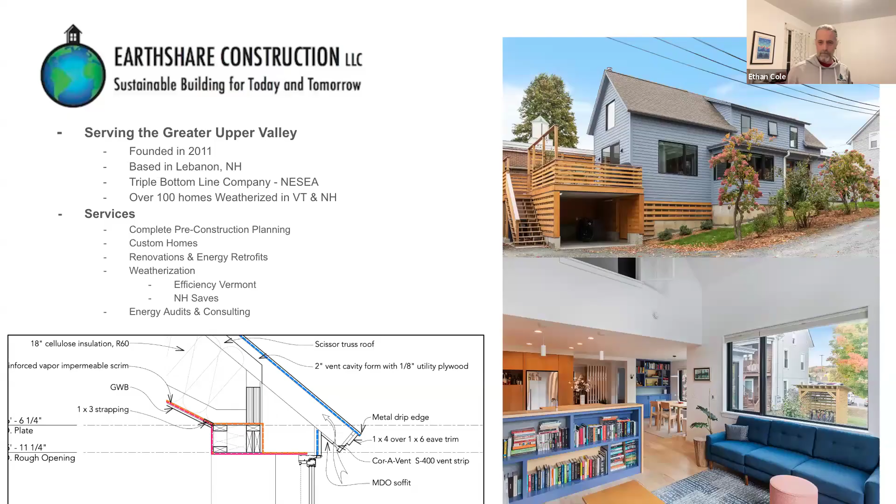All right. Sorry. It's okay. Yeah, I appreciate you plugging that info and providing that info for us, Ethan. Everybody, really appreciate you being here tonight.

My name's Ryan Hereth. Julian did a great job of giving a little bit of background about me and our company, the services that we provide primarily in New England, as well as the Mid-Atlantic, our land planning, design and pre-construction services, and construction management, as well as the actual carpentry and construction of the buildings. One of the things that sets our company apart is I think we're a service-based company who values building relationships as much as we do the buildings themselves.

And we're continually trying to improve our processes, and a lot of what I've learned in the last 10 years is working with people like Ethan, and having the opportunity to really open up the dialogue. I'm really grateful to have this opportunity, because as Joanne also mentioned, we have some great resources in the area like BS and Beer, and as much as you guys can take part in these conversations, it's really important to open things up so that we can all learn. I'm excited. I'm sure there's things that I'll be learning tonight with some feedback and some questions from you all as well.

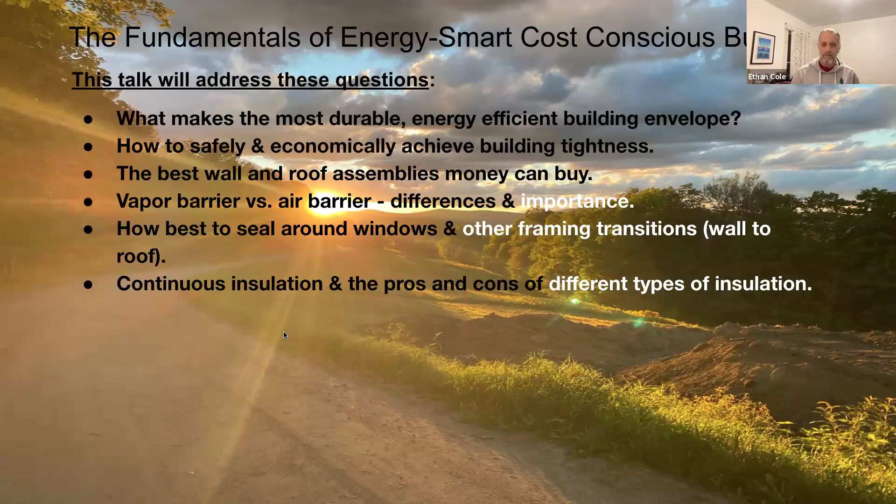Some of these topics we're going to go into more deeply than others, and we'll be leaving time for questions at the end. And as you can guess, the answers aren't always as simple as we'd like, but these are starting points.

The fundamentals of energy smart building, we got a little animation here. Let's define a little bit about what energy smart means. For starters, it refers to a building that uses less energy. One way we can refer to it is as operational energy, the energy that's used for heating and cooling of the building, lights and outlets, which is sometimes referred to as energy use intensity or EUI. And also durability. An energy smart building is one that's going to be durable. It's going to last a long time with minimal ongoing maintenance.

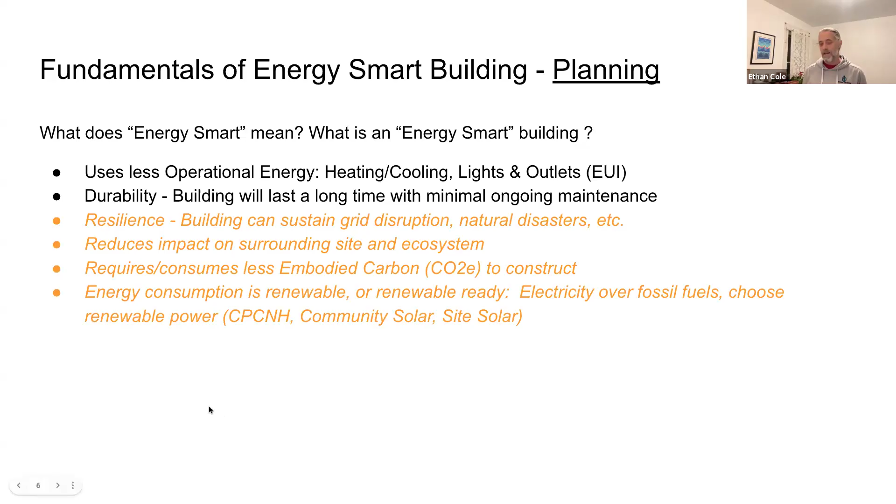Some of the other topics that are relevant to energy smart that we're not going to spend as much time on are resilience, a building that can sustain a grid disruption or natural disasters without being lost, reduces impact on the surrounding site and the ecosystem, consumes less embodied carbon to construct. We'll touch upon that, but there's been some exciting advancements in recent years allowing builders to understand the embodied carbon emissions of building materials. Energy consumption, when it's renewable for a building, can have substantial impacts.

And so choosing electricity over fossil fuels, choosing renewable power options, whether it's site solar, community solar, or the recently formed Community Power Coalition of New Hampshire. And also thinking about transportation energy and what's going to be required to get to and from the building.

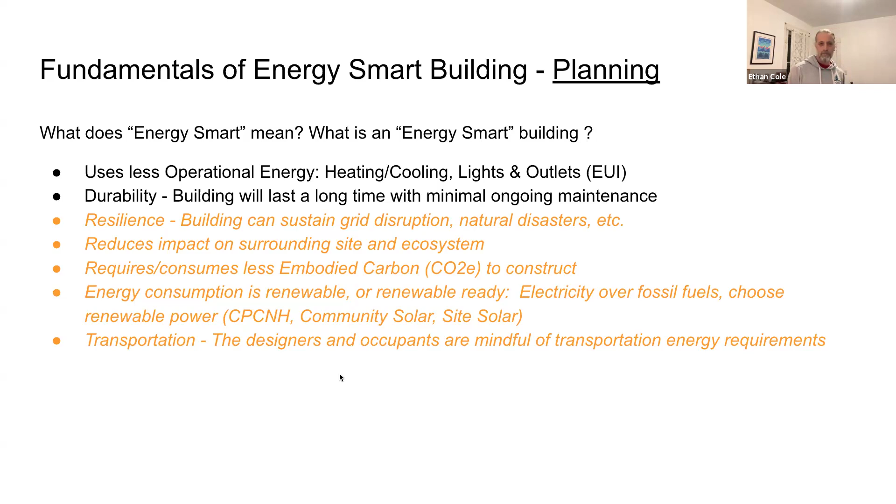So construction methods and techniques, our relationship to buildings, access to grid-tied power and energy has evolved dramatically in the past few hundred years. In the 19th century, we were building drafty structures with regionally accessible natural materials and inefficiently heating the buildings with fossil fuels. Designs often incorporated centralized fireplaces to heat the core of the home, or in some cases, fireplaces dedicated for each

of the rooms independently. In the 20th century, we started implementing man-made materials into our buildings, improved our insulation, in some cases, introduced mass production of materials with promise of greater energy efficiency, material durability, and longevity. We also gained broader access to grid-tied power.

In the past 30 to 40 years, we've come to learn that our buildings are complex systems that we need to look at as a holistic design. The industry is entering into a new phase of understanding about energy efficient design, material selection that enhances performance, durability, and environmental stewardship.

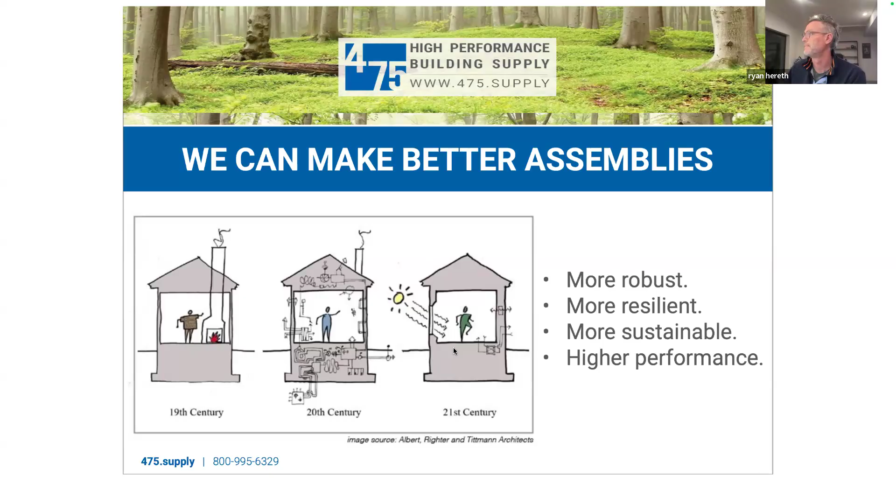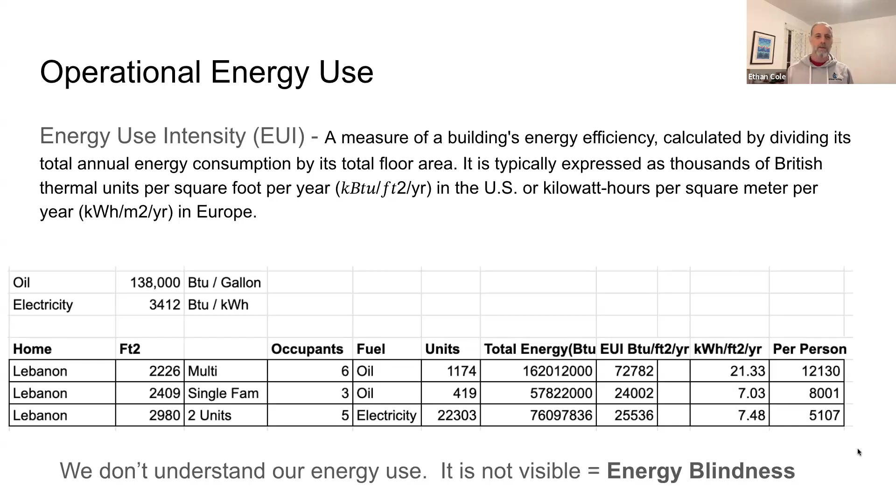Then we just show a conversion into kilowatt hours per foot per year, and then for the thought exercise, how many BTUs per foot per year are being used per person. So this concept of not really knowing how much energy we're using, whether it's for transportation or our house and all the other things we use and consume, is something called energy blindness. Thank you. I think that's enough on this slide.

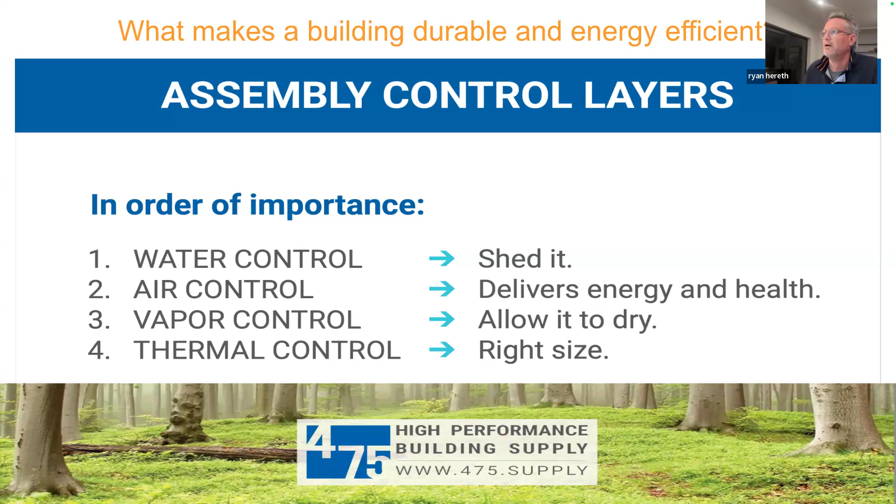Yeah. So EUI is one metric for how we measure the performance or energy use of a building. In understanding and properly constructing our building envelope assemblies, the control layers within those assemblies are the methods for how we achieve energy efficiency and durability. The fundamentals of energy smart design or building design.

So some of the characteristics and principles here that we'd like to cover with you are specifically the geometry of a building. So the more simple the geometry of the building, the less energy it's going to require. And conversely, the more complex the geometry, the greater cost to build and operate as well. The smaller buildings tend to use less energy. Specifically, multifamily buildings use less energy per capita, per unit, per person, per building.

Similarly, site design and building orientation are also key factors. Fenestrations, windows, and doors have a big impact on building performance due to their relative reduced thermal efficiency compared to walls and roof assemblies surrounding them.

Building envelope. We want to talk about our building assemblies, the walls, roofs, and foundations, and specifically making sure that we have an envelope that's airtight and durable. We'll touch on some of the operational energy use, the heating and cooling energy use intensity that Ethan was just talking about, the EUI, the mechanical systems within the building, appliances, ventilation, both for the equipment in the building as well as occupants. Lighting and plug loads are also factors that we're probably not going to be able to get into today, except for maybe in the chat afterwards.

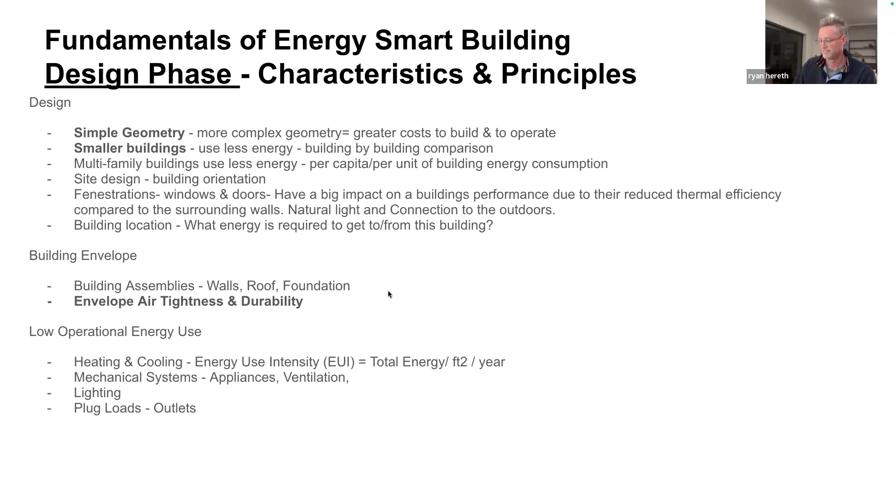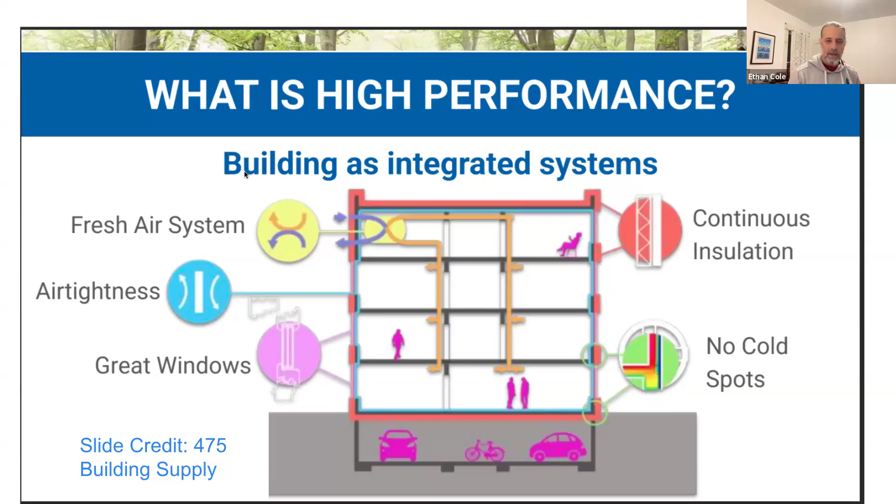So this is just a nice graphic from 475 that shows the components of a high performance building. We need to pay careful attention to continuous insulation at the entire perimeter of the envelope, especially including cold spots. There's always going to be some vulnerable spots in an assembly at transitions and other such locations. You want to have great windows. If you're going to have a great envelope, you want to have great windows to go along with it. When you're going to make a building tight, you need to bring in mechanical ventilation, and air tightness is the primary driver of energy efficiency.

So Joanna posed the question about how to safely and economically achieve building tightness. And I think this comes from a couple of places. One place is we've all heard the notion that a building needs to breathe. And it's well known in modern construction that is not true. The occupants need to breathe, and a building needs to be able to dry out. So the notion that a building needs to breathe, and also the recognition that if you do not manage the moisture in your building adequately, you can have trouble.

So in order to safely achieve building airtightness, you need to make sure your assembly is vapor permeable, that it can dry out if it gets wet. You also need mechanical ventilation. The occupants need fresh air. And if there is a combustion appliance of any kind, make sure it has clear, closed combustion air and exhaust paths. We advocate for no fossil fuels, but if you're going to have fossil fuels, or wood stoves are okay, they just need closed combustion, dedicated combustion air, and a flue. Ryan, you want to talk about economics a little bit?

Yeah, we need to make sure the air barrier is clearly identified and detailed during the design phase. It's critical for coordination with our crews on site, as well as ensuring that we have continuous air barrier on both sides of our assembly, which we'll get into later. We're constantly designing the process and sequence of that building with that air barrier in mind as well. And we'll get to that later as well.

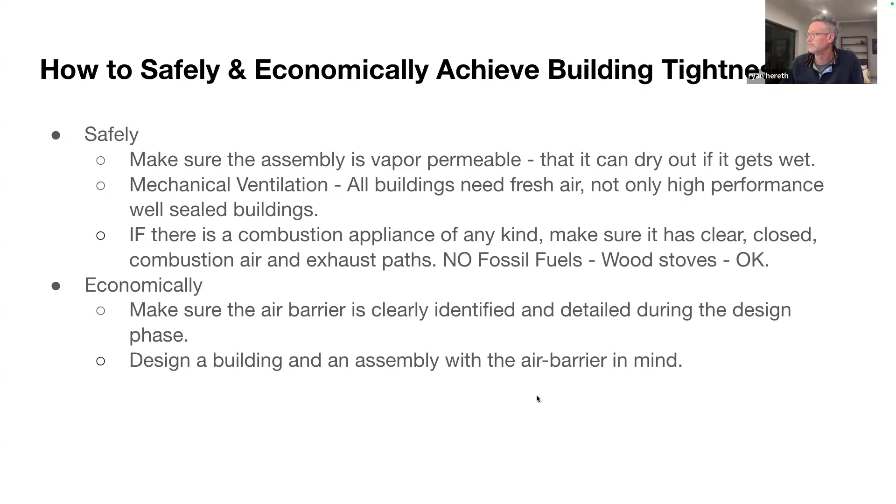So this one now, slide that shows a ventilation system. Yeah, just emphasizing the importance of ventilation. And I'm sure Joanna will probably have whole talks on ventilation in the coming months. Yeah.

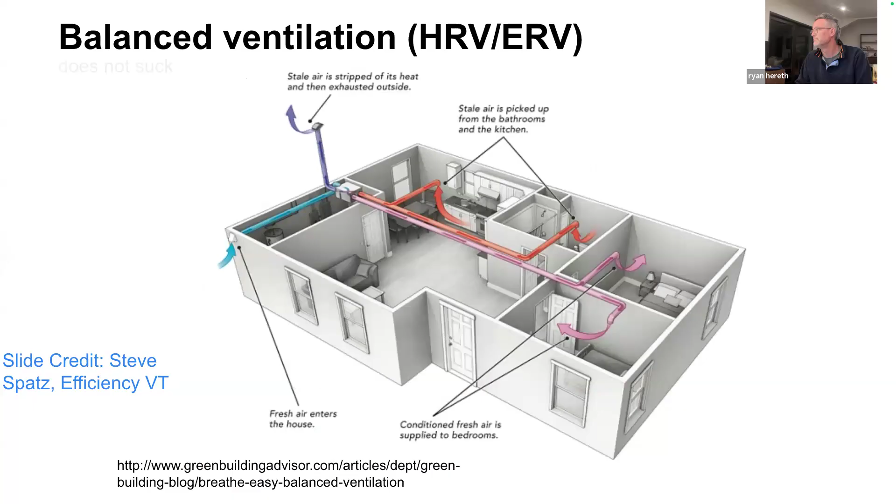Generally, just want to talk a little bit about insulation types. We're not going to spend a whole lot of time on this today, but the widely used ones in the industry are fiberglass, foam plastics like polyiso, EPS, extruded polystyrene, cellulose, which is a shredded paper, rock wool, mineral wool, which you may be familiar with, wood fiber insulation like from Timber HP in Maine, Gutex or Steico, which are coming from overseas, and straw panels and straw bales.

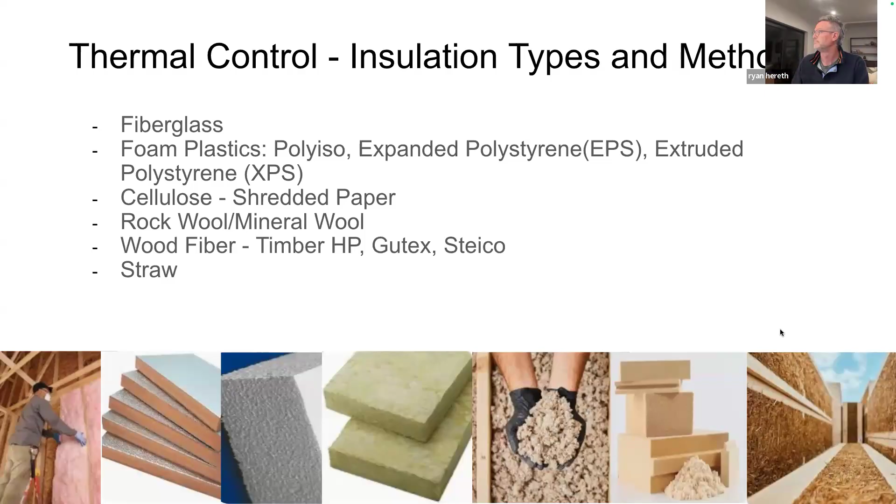So the best wall and roof assemblies money can buy. This is a question that we love to debate, but also needs to be defined. So how do you measure it? Do you measure it by thermal performance and its resistance to heat loss? Do you measure it through affordability, through the carbon emissions of the building, either during construction, during operation, or both, or the longevity or durability?

Some of the best wall and roof assemblies money can buy include, and we'll talk a little more about these, a double stud wall or otherwise thermally broken stud wall with cavity insulation only in the cavity. Or you have exterior continuous insulation where it's put on the outside of the structural building cavity.

These days, as you probably all know, there's all kinds of companies that are offering panelized walls and modular units to build your homes, and there's a lot of good products out there, and they all can achieve similar results. People often ask, what's the best way to do it? What do you think of this? What do you think of that? And there are pros and cons to each. They're not as different as you might think, and you really have to define what your goals are and what your values are in order to make those kinds of decisions.

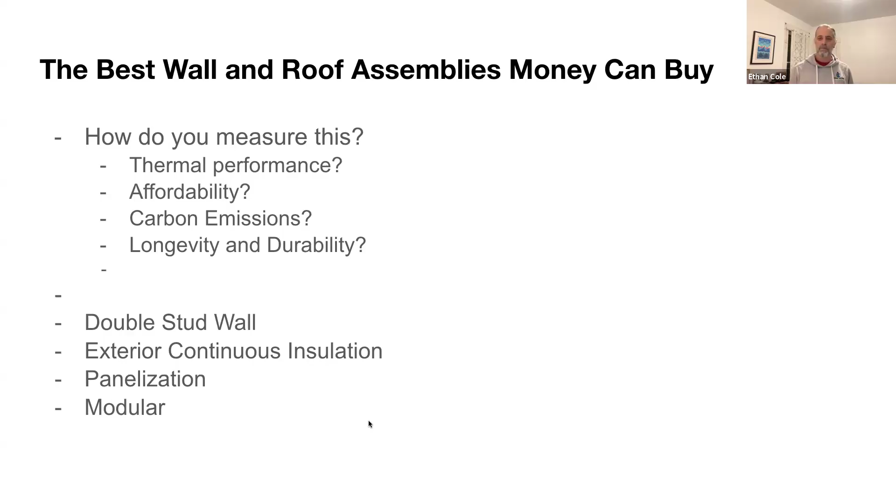So this just illustrates the double stud wall, which can be done a number of ways. But as you can see here, you have an outer structural wall generally. On the top left here, you can see it's a 2x4 structural stud wall. And on the inside, you have a 2x3 framed wall. And the entire cavity is filled with, in this case, it looks like it's probably cellulose. That's what we use. And so the space in between the stud walls is the thermal break, so that the wall is not a continuous thermal bridge.

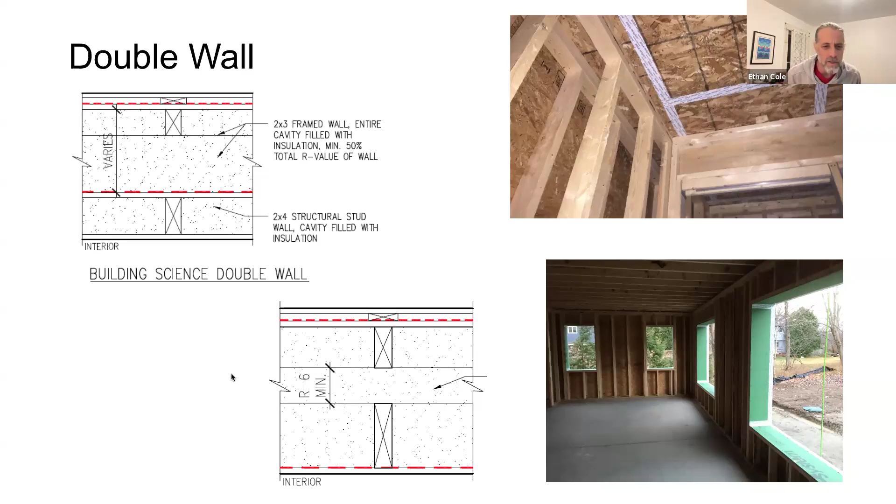You could build the entire wall out of a 2x12, a 12-inch stud, but then you'd have bridges at every framing member. And that's what this gets away from. It also uses less wood. Yeah, the bottom wall is similar. It just uses a 2x6 and a 2x4 wall for the interior, but they perform very similarly.

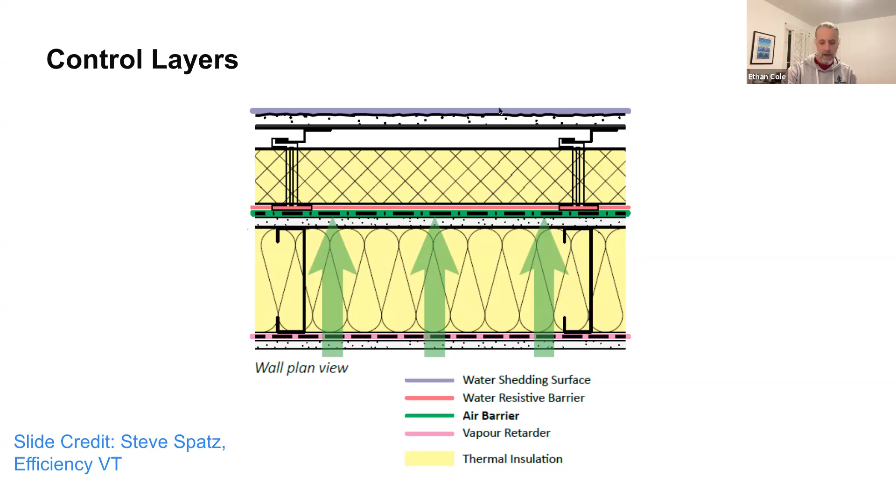Okay, so we've talked a little bit about our wall assemblies there, the envelope of the building. Now we're going to take a second to talk about thermodynamics. So conduction, convection, and radiation.

Excuse me, Ryan, I apologize. I wonder if this might be a good time, before you go into the thermodynamics, to see if anyone has questions about what you just talked about, the wall assembly and the different layers. People could put something in the chat or just unmute and speak up. There were a couple of questions in the chat, but I don't know that they apply. And just so you guys know, we will be diving deeper into the wall assemblies. Oh, you will? Okay. Yep, we'll be kind of coming back to them.

Sorry. It's okay. So thermodynamics comes into play because conduction, convection, and radiation are three primary types of heat transfer occurring in our buildings. And they're constantly interacting with our walls, roofs, and foundations, which absorb and release heat through conduction. Convective air leaks out at the building seams between the walls, roof, and foundation, and penetrations for exterior plumbing, light fixtures, etc., if not sealed well. Radiation from the sun can actually overheat our buildings if they're heavily glazed.

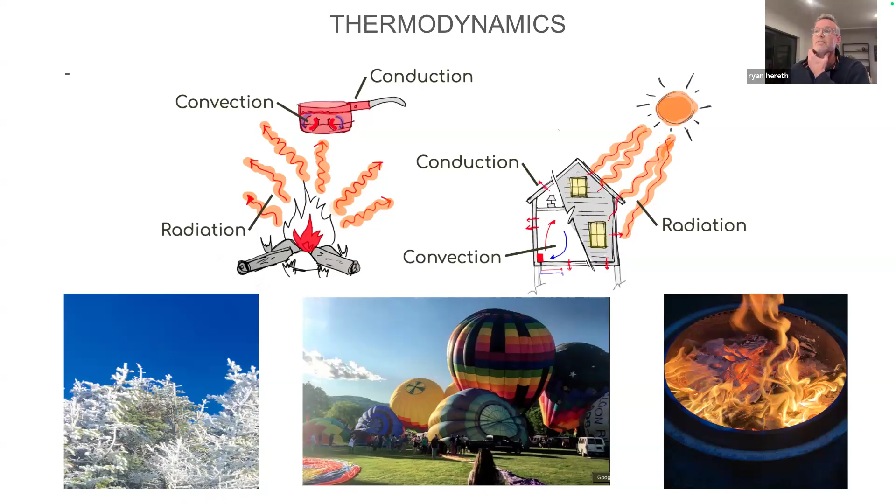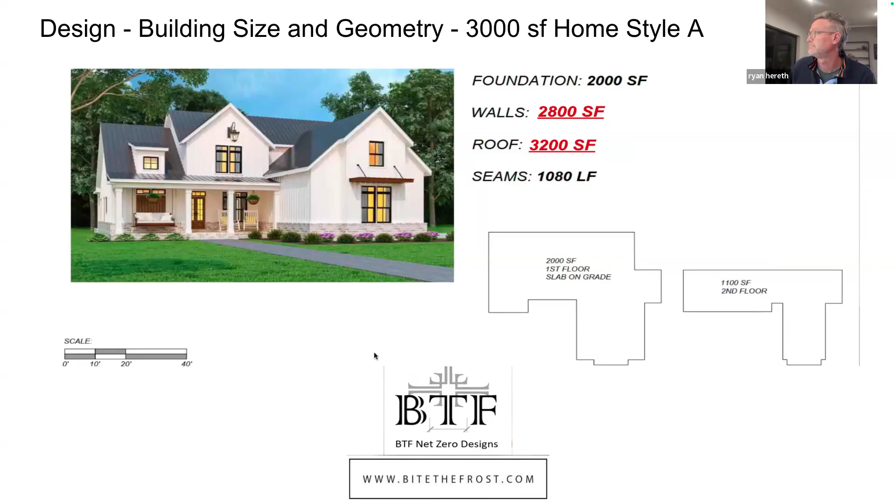In scenario A, or style A, it's a more complex geometry with multiple volumes intersecting. It's a two-story building with a 2,000 square foot footprint, 2,800 square feet of exterior wall surface, and 3,200 square feet of roof surface, a total of 1,080 linear feet of seams. This is just a visual of what those wall surfaces, roof surfaces, and foundation surfaces look like for style A.

Style B is a more simple two-story cape home with a 1,750 square foot footprint and a 1,600 square foot wall surface. It has 2,500 square feet of roof surface. Relative to style A, this is a very efficient use of floor space with a considerable reduction in surface area and seams. Again, a visual of style B's surface areas.

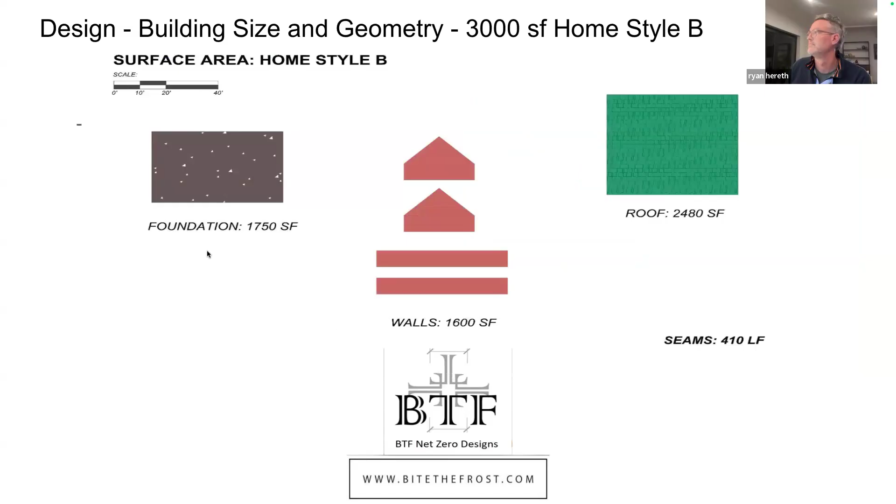Style C is very simple geometry, similar to style B, yet with an even smaller footprint of 1,150 square feet and a taller eave wall. So less square foot per floor, but there's 3 floors inside, which, again, add up to that 3,000 square feet. The key difference between C and B here is that the square foot of the walls has increased from style B, but the surface area of the footprint and the roof have also both significantly decreased.

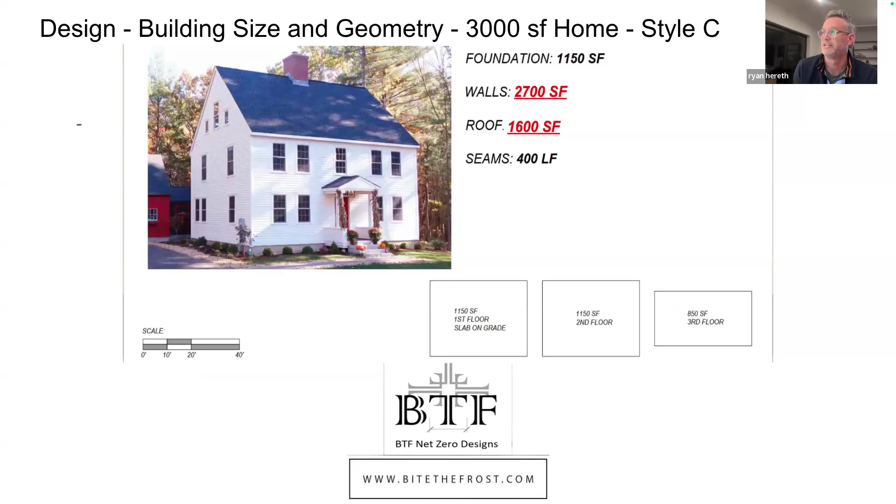If we look at the total square footage of exposed surface area to the exterior envelope, we can see how the geometry of the building plays a big factor in how there's opportunity for heat transfer, heat loss, and gain in our buildings, with buildings that all have the same square footage. So when we're designing buildings for energy efficiency, we need to be thinking about simple geometry.

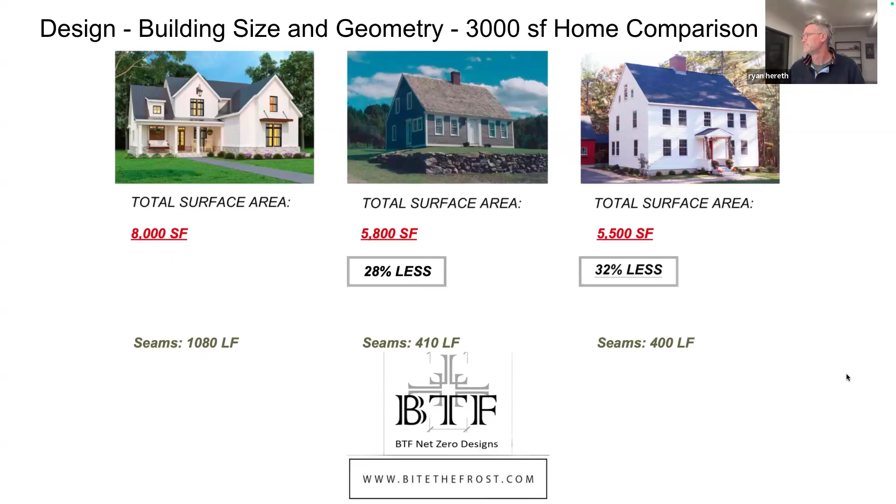So this next slide is really to depict another example of this. We have two buildings that are about the same square footage, just right around 1,450 square feet. The only differences between these two buildings, beyond that very slight square footage difference, are the exterior wall surface area, the window and door locations, and the quantity of those windows and doors. The impact between these buildings because of that building geometry and surface area is a 60% increase in the heating

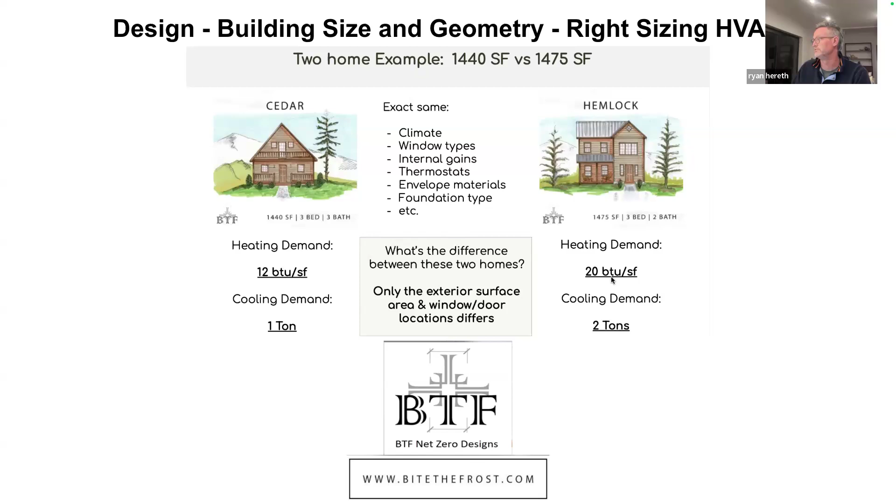and cooling demand. You can see the building on the left here has a 12 BTU per square foot heating load, and the building on the right has a 20 BTU per square foot heating load. That's the energy use intensity number I referred to earlier. And when building new and designing for high performance, you can get that number nice and low.

Yep. So the big takeaway here, folks, is that the two biggest levers we have to pull on to be able to create energy efficiency in our buildings are simple geometry and getting our buildings airtight.

I just want to speak to, so someone in the chat is asking a question about ventilation. They're having a house built, and we can talk more about that ventilation later. I think we'll have time for that, because that's critical. But I would say if you're building a house, you want to know what your air tightness target is, what your builder is aiming for, and how that's going to impact the performance of the building.

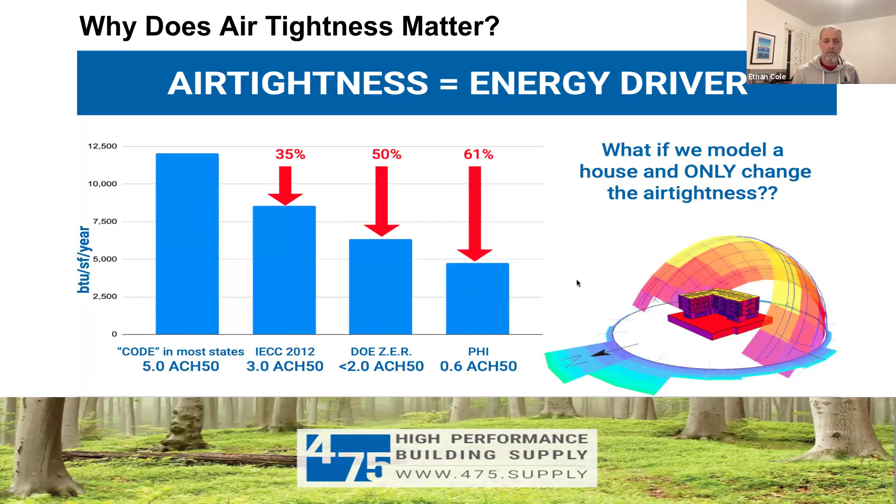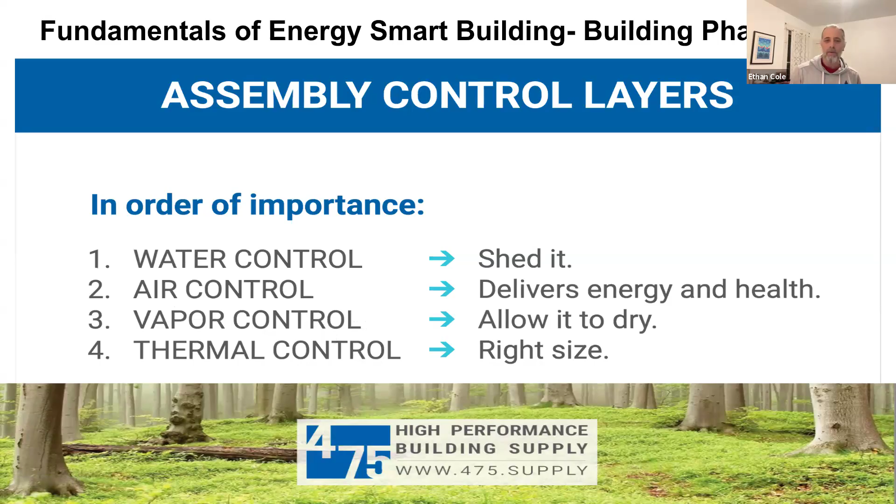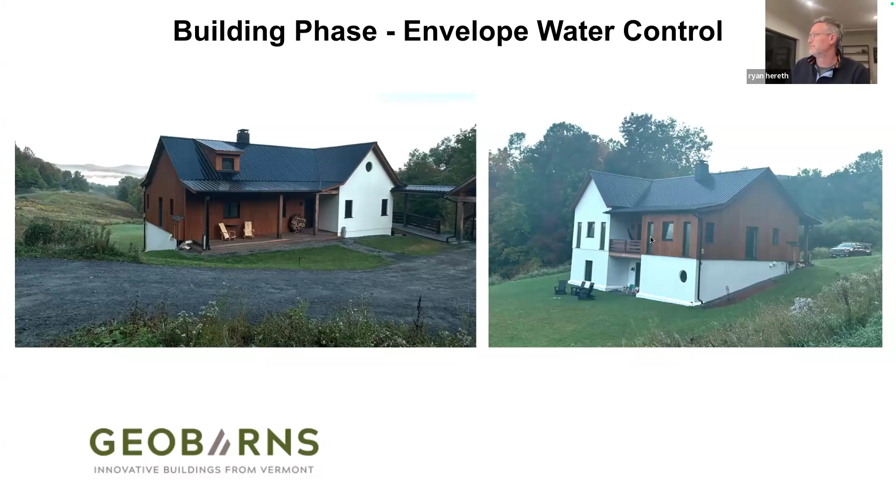Wind-driven rain hits wood siding, which is strapped out on a rain screen, or a lime plaster, as you can see on the white surfaces here, which provides protection to the surfaces within that wall assembly below.

So when the sun hits that siding, with that air gap behind it, the siding will heat up the air behind it through conduction, and then create a natural vapor drive to pull any moisture that's in that assembly, or has found its way behind the siding or roofing, out of that assembly.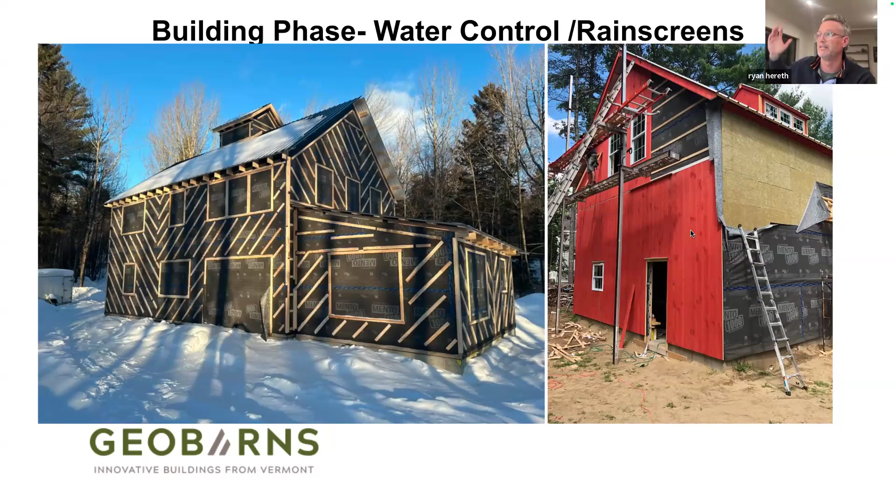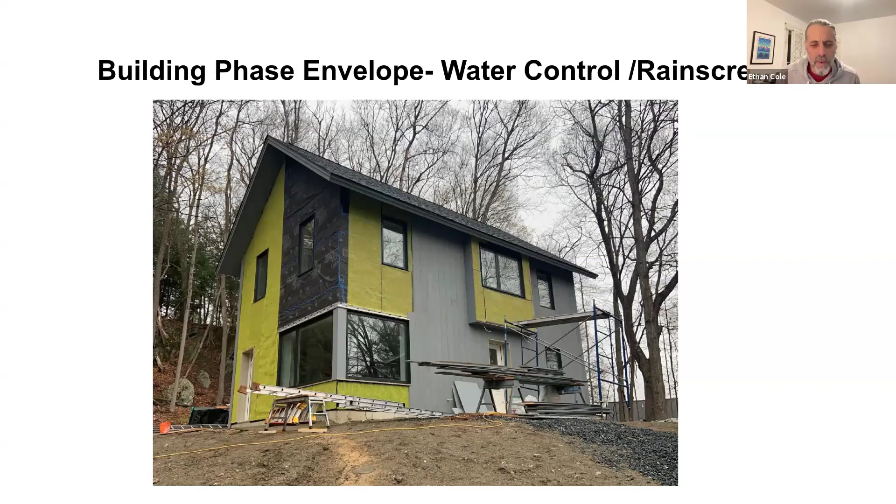This is just another type of rain screen. Instead of wood strapping here, we're using a mesh product that's sometimes called Cedar Breather or Home Slicker that's behind the vertical pine siding. The black membrane you can see there is the air barrier on this house.

So here on the left is a detail of one of our vented roof assemblies in process. We have some transition taping here that's happening between our water-resistive air barrier coming down the roof and transitioning to shed water down the wood fiber insulation on the walls of our buildings. We have strapping, rafter furring strips that follow the rafters up the top of the building, and then purlins that we're mounting our roofing to.

The center photo here depicts the taping and air sealing around our windows, and proper detailing and flashing of our sills to shed water as they hit the window and run down the face of the building, so it sheds water over where the cladding will eventually be.

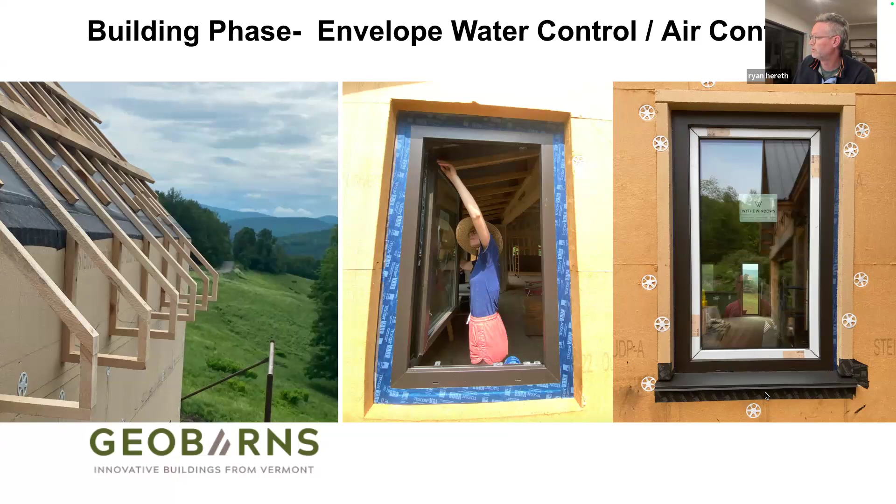There's a similar set of photos in that same sequence. You can see how the horizontal strapping here on the left is how we're mounting our extension jambs and siding. Similar with the plaster detailing around, connecting to the window and shedding down onto our metal sills.

The photo on the right is just a depiction of how natural lime plaster can act as a water barrier, air barrier, and a vapor open, vapor variable vapor retarder. We'll get into that in a little bit.

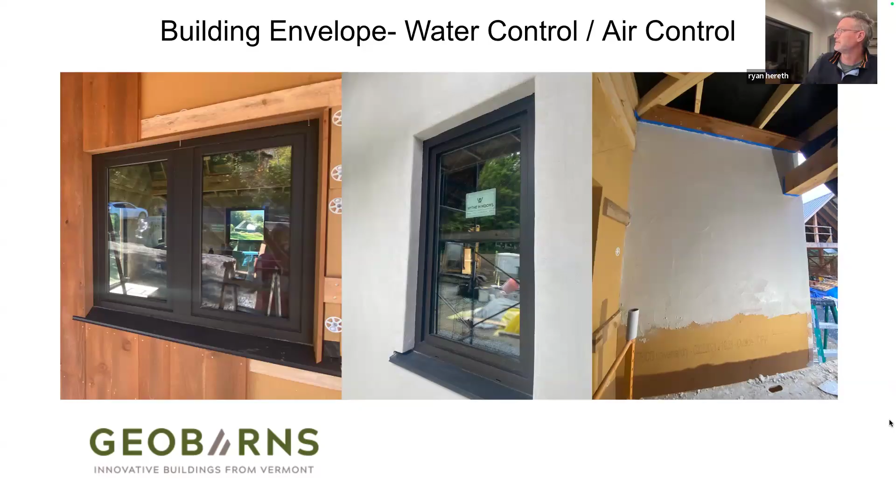When designing a house, you want to be able to draw a continuous line using a pen that indicates the control layers, unbroken control layers. And in this case, this is showing an air barrier that's at the interior of the finished surfaces.

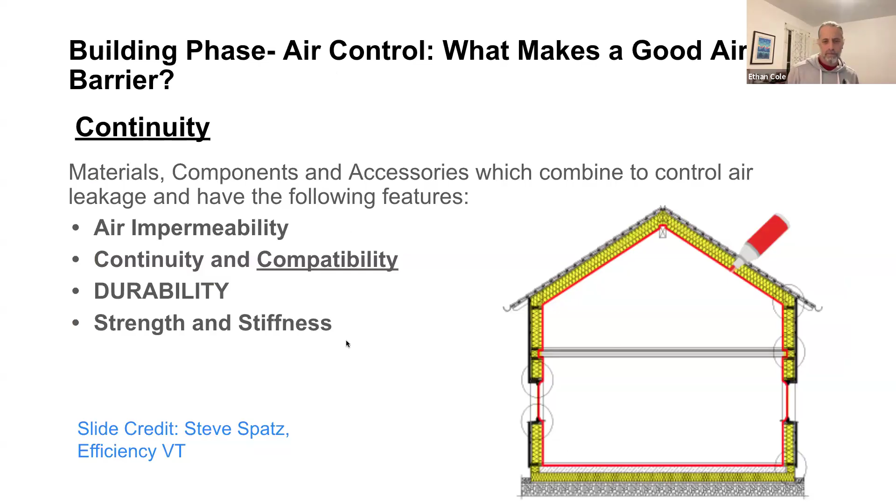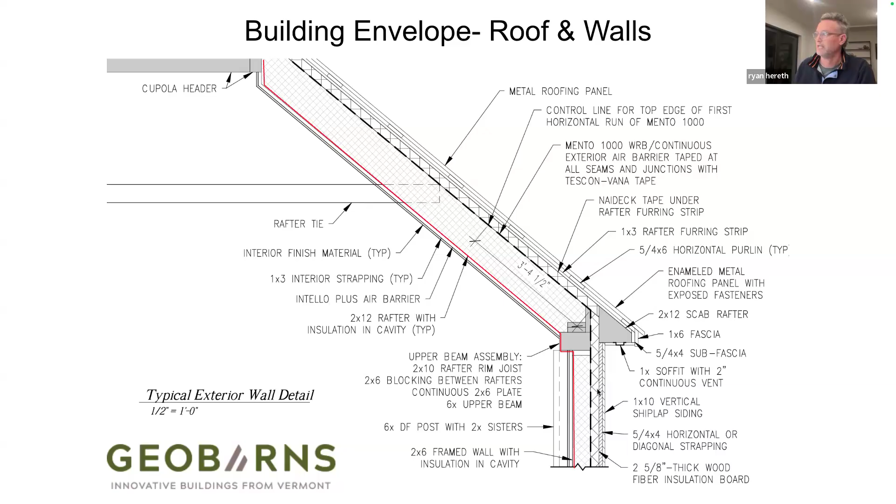So similarly with the interior of the building, we want to be able to create a line, shown in red here, that goes all the way around the inside of our conditioned envelope. We also want to have that air barrier running, depicted with the dotted line here, around the exterior side of our envelope. So we're encapsulating our walls, roofs, and foundations on all six sides of the building.

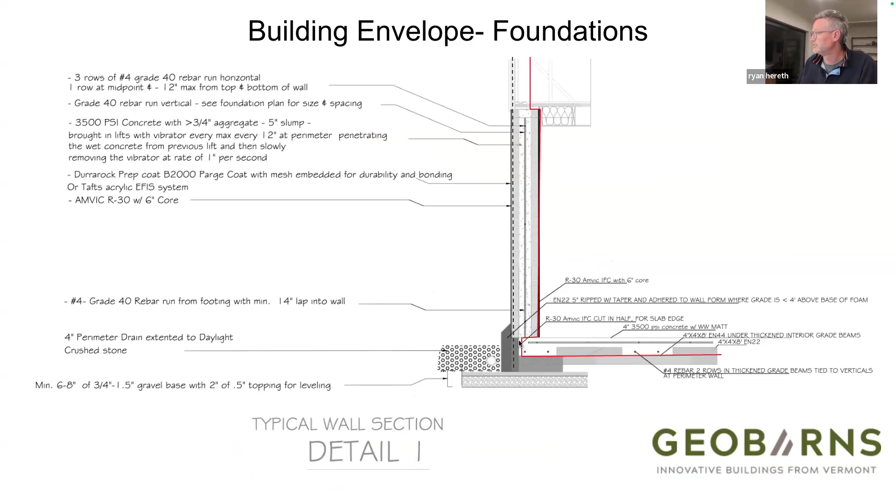We can see those transitions at those junctions where our foundation meets the walls. We want to be able to tape those seams and air seal them. Similarly, where we have vapor barriers underneath our foundation slabs, we want to make sure we're getting good connections at those transitions.

So just a little introduction to the difference between air barriers and vapor barriers. Air barriers control energy loss, and they need to be as close to 100% continuous as possible. An air barrier that's only 98% effective is not going to do a very good job and give you great results. You need it to be 100% implemented. By contrast, a vapor barrier that is 90 to 95% effective will stop the majority of the vapor.

So important distinction there. But the air barrier and air-driven moisture is one of the number one concerns. So you need to have a good air barrier. A vapor barrier alone is not going to accomplish the goals of protecting the building envelope. Air barrier will stop moisture transport through air movement.

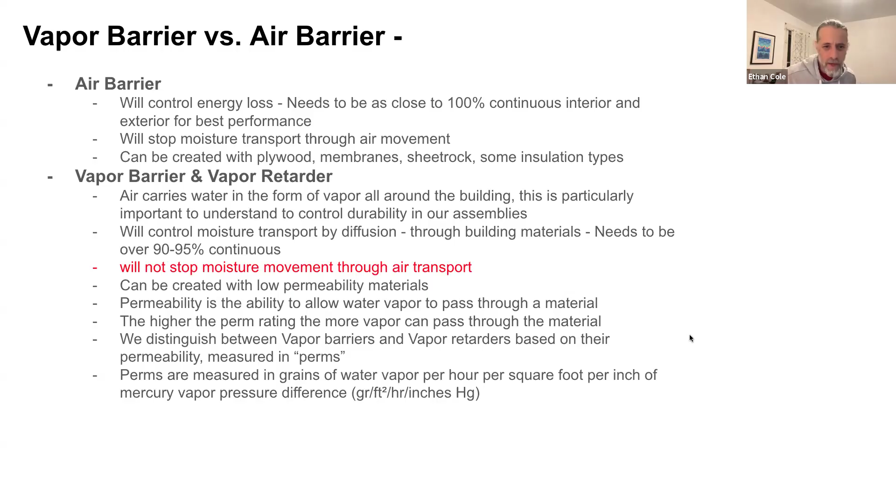Heat and moisture wants to move from where there are higher concentrations to where there are lower concentrations. So from where it is warmer to where it is cooler. So generally, our heating season is when we're concerned about this stuff. And so we will talk about the permeability of different materials and how they stop the movement of water, or conversely allow a certain amount of moisture to travel through them. The higher the perm rating, the more vapor can pass through the material.

Here we see the perms of various building materials. The blue, the Stego-Crawl, is a plastic 15 mil vapor barrier intended to not allow moisture transport. So you can see that it falls into the vapor barrier class 1. Then between 0.01 and 0.1 is a vapor retarder class 1. And the next level up is vapor retarder class 2.

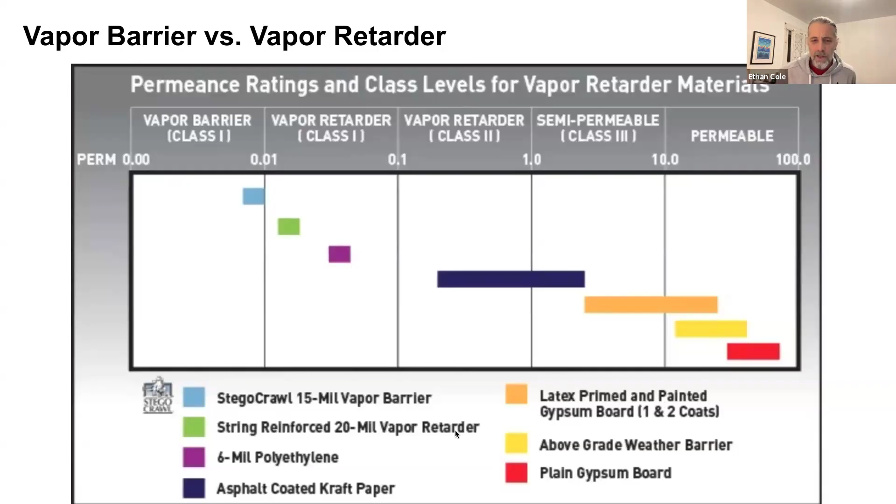Let's see, in the vapor retarder class 1, you've got your plastics that are thinner. So even those plastics do allow some moisture transport. Then you've got your asphalt coated kraft paper, felt paper that you'll see on some older houses. And then as you move up into semi-permeable class 3, you've got latex primed and painted sheetrock. And then your yellow is some sort of weather barrier. And then plain sheetrock that's not painted has a higher permeability rating.

So one of the things we need to be mindful of is that when we combine our air barriers and vapor barriers and these materials within our assemblies, we need to be careful about creating what they call a vapor sandwich. So we want to make sure that ideally we're using air barriers that are vapor open, that are in that vapor retarder category and have a high permeability, or that are vapor variable, sometimes referred to as smart vapor retarders. And what that does is it stops air from getting into that assembly, but it allows vapor to diffuse through that cavity.

Which also means that seasonally, if we have that rain screen strapping on the outside of the building, or we're cooling our building on the inside, that moisture, the humidity, the vapor that gets into that cavity has the ability to dry to the outside of the assembly.

Ryan, I think we got to pick up the pace a little bit. We're about 34 minutes in, or 35 minutes in, I think. Okay, it looks like we got like 17 or 20 minutes before we should start taking questions.

Okay, sure. Another area that is critical is if we have flat roofs or a vapor closed roof membrane, we just need to be mindful about using spray foams in those areas, because they can cause that vapor trap that we were referring to.

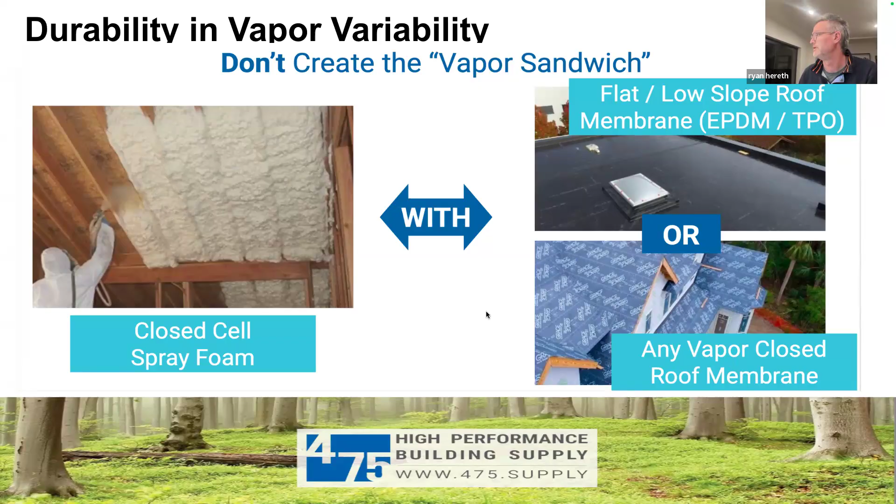If you have moisture moving through a wall, you'll see it gets to a point where it hits the dew point and where it condenses and freezes. And in this photo, the moisture has gotten through the fiberglass, frozen, and created a layer of frost. And this is a condition that happens out there all too often.

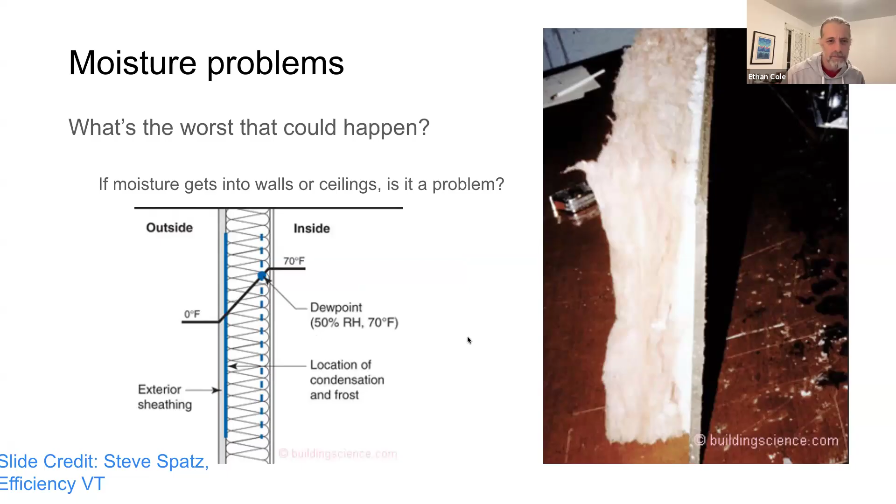One way to help keep that from happening is by using these intelligent membranes, or variable vapor retarders, on the inside and outside of our buildings. Some of the ones that Ethan and I like to use are distributed by 475. They're from a company called Proclima. And this is the Mento 1000 on the exterior. They also have an Intello membrane on the interior.

These materials, somewhat miraculously, have a low permeability rating when the relative humidity is lower. But when moisture does get into the assembly, the permeability rating changes. And so, yeah, pretty fascinating. I don't really know the physics of it. Haven't heard anybody really explain it comprehensively. But that's what these materials do and claim to do. Yep. There are some great videos on the 475 building website that delve into those physics a little bit deeper. I don't think Ethan and I are qualified to do that here tonight.

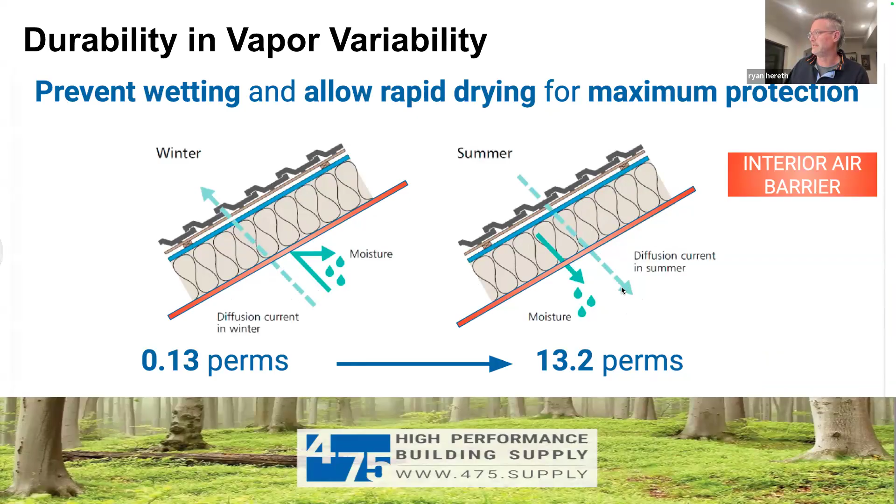This is another pictorial illustrating that diffusion happening in the wintertime. Vapor can diffuse through the cavity, but moisture is held out. And in the summertime, any moisture that finds its way into the cavity can dry to the colder, drier indoor conditioned environment. Yeah, going from 0.13 perms to 13 perms. Yeah, pretty impressive. Yep.

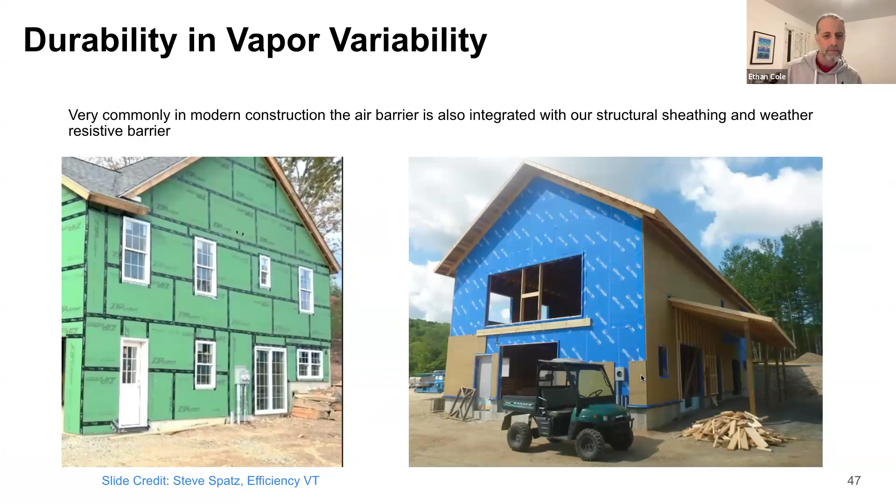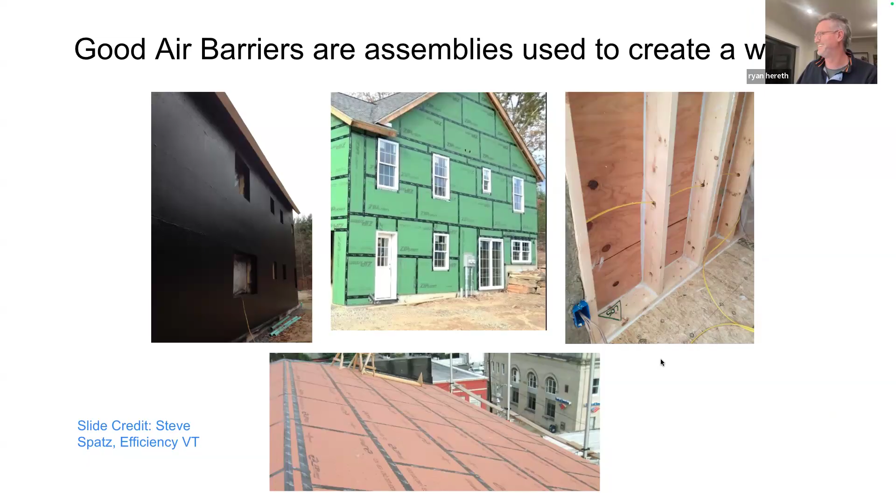So yeah, just some different ways to accomplish an air barrier. You got the Zip System on the left. You've got the Henry Blueskin on the right, and in that project, it looks like they're installing rigid mineral wool boards over the top of the Henry Blueskin. On the left there, you've got a spray applied membrane. Tremco is one of the companies that does those kinds of applications. And then on the right there, you see some studs that have had a whole lot of caulk applied to them. I've had New Hampshire building inspectors make us do this. No kidding. Yep.

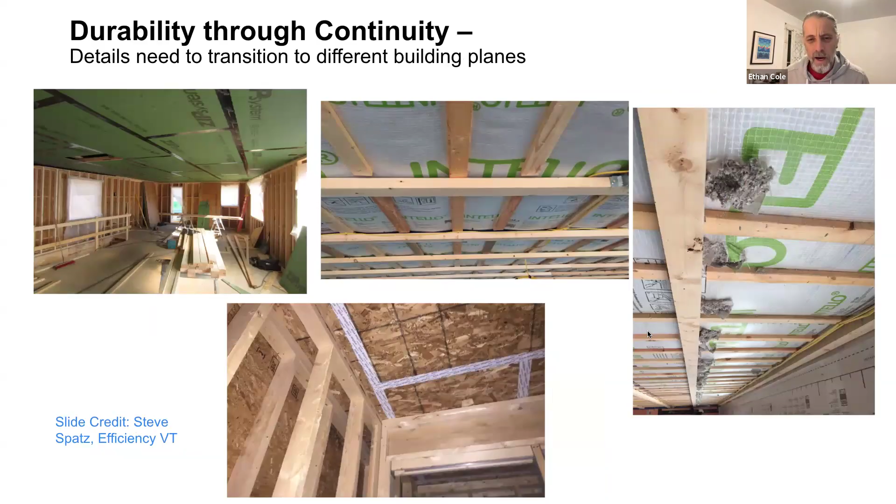Some Intello, it looks like, utilized at the ceiling. When you're using that for an air barrier at the ceiling, you can install some strapping so your wiring can stay to the inside of that air barrier. And then you'll sometimes drill some holes in it, cut some holes in it, blow the cellulose in there that you can see poking out, and then most of the time, you'll tape up those holes. Yep.

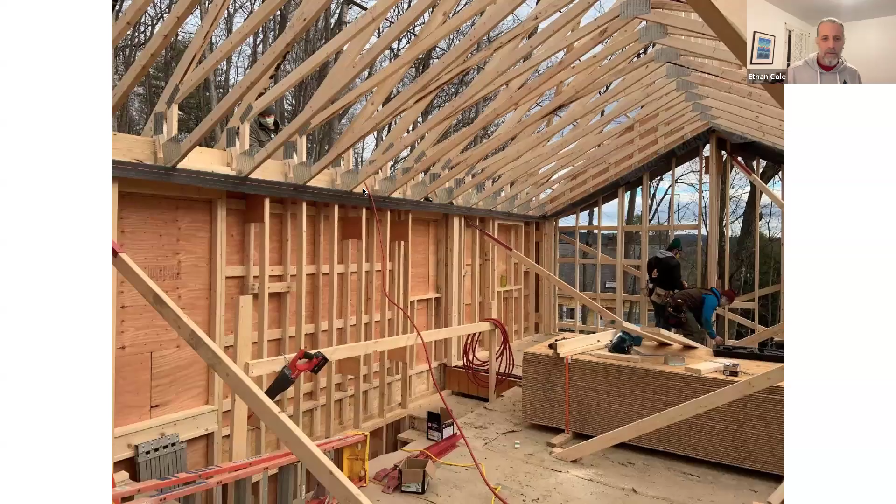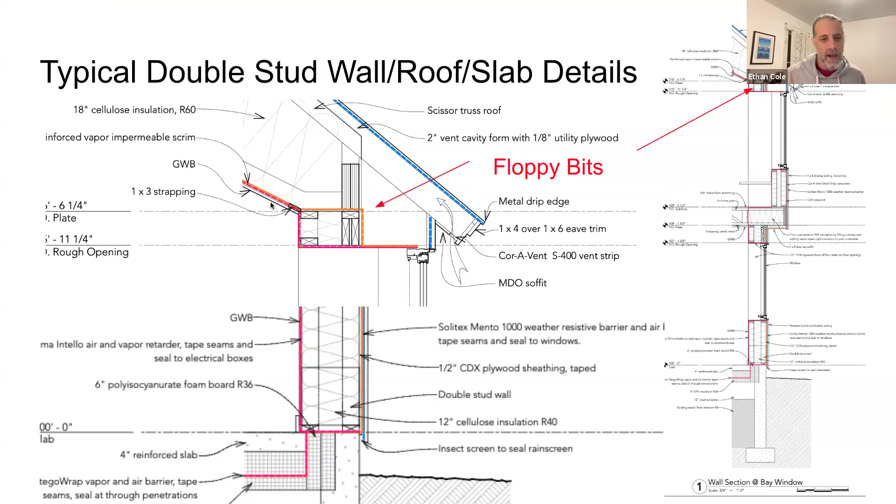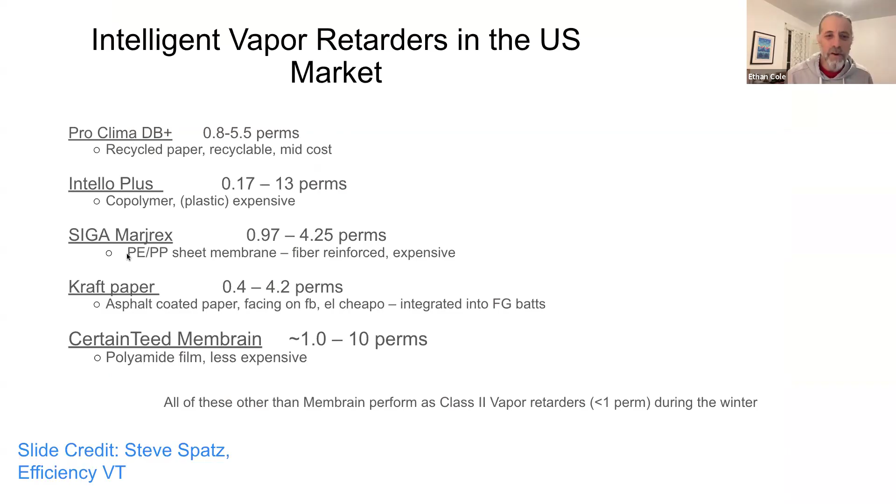So this shows a typical double stud wall and some roof and slab details. And the thing I want to point to here is the idea of the floppy bit, which is a really effective strategy for transitioning the air barrier from the exterior plywood in this case, and that's what Ryan's pointing to here, is this black membrane which comes over the top plate, and then the roof trusses are set atop that, and then the air barrier, once it gets to the inside, runs along the bottom of those trusses. So floppy bit is actually a technical term to refer to the materials used at these transitions. This is just a few different intelligent vapor retarders that are available in the US market.

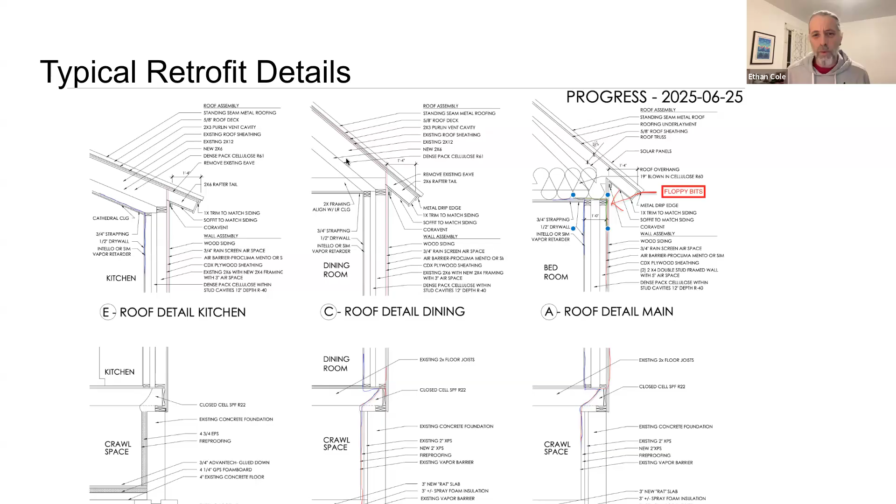Here we're showing that when you're doing an energy retrofit, there can quite often be a number of conditions and a number of different details in the assembly. And so in this case, the air barrier exists to the outside of the framing in some cases. There's vent cavities on top of the sheathing in the detail on the left, and over on the right, it uses the same floppy bit transition that I was describing in the previous slide. Another example of the floppy bits in play here.

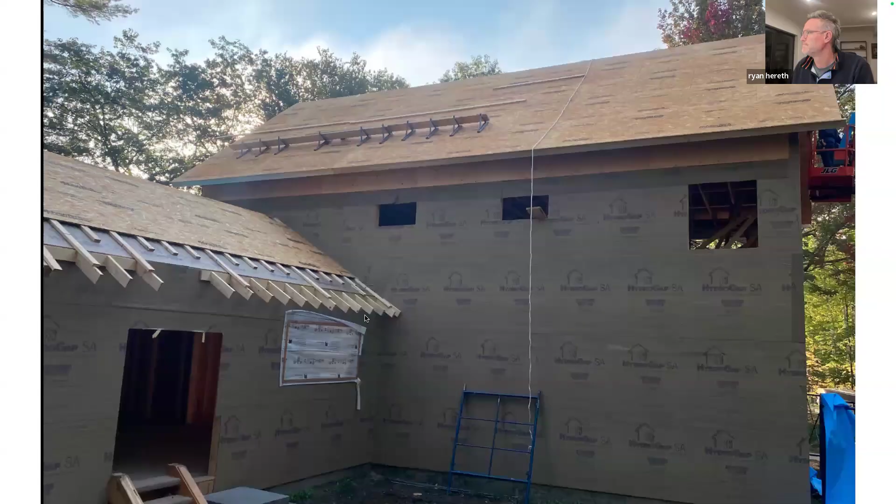In this slide, you can see that in the main volume, the larger volume, the air barrier is that HydroGap material there that then transitions above those windows to the bottom of the roof trusses. Whereas on the left, because it was an existing volume, the air barrier travels up over the top of that sheathing, and then you have an air space vent cavity above that sheathing, and then a second layer of plywood.

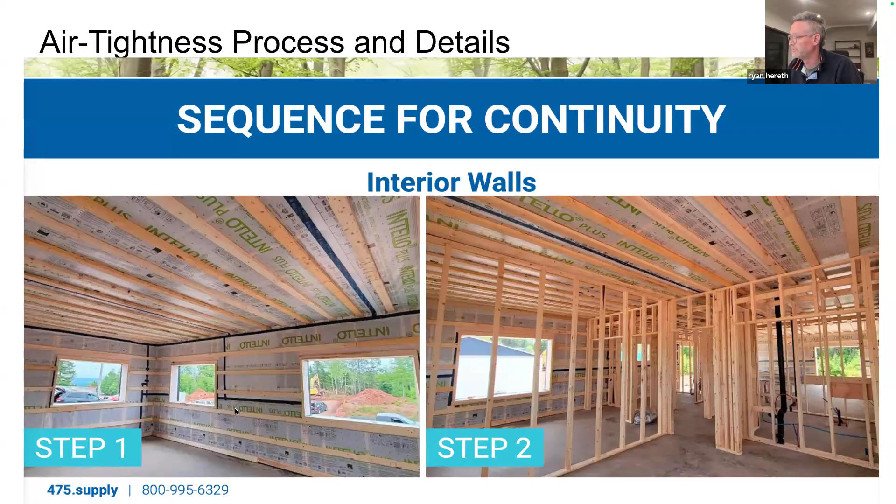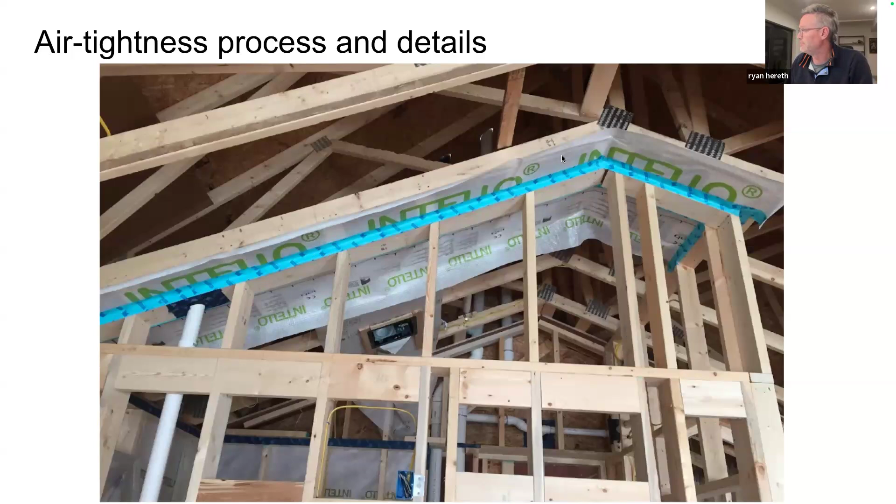One of the things that's important to do is also think about the sequencing. That's what the floppy bits are doing, allowing us to install that air barrier that we can then tie into the assembly as we're putting it together. So similarly, we can see that on the second floor with the flat ceiling, we've installed the vapor barrier, strapped out the walls, and then we frame our interior walls. For cathedral ceilings, oftentimes what we'll do is set blocking between our rafters, then install strips of the interior air barrier and vapor control layer, and then frame up our walls underneath that.

And we convert the reading of cubic feet per minute into air changes per hour, ACH 50. Air changes per hour at 50 pascals. And CFM stands for cubic feet per minute. So for an example house, say it's a 2,000 square foot house with 8-foot ceilings, 2,000 square feet times 8-foot ceilings gives you a volume of 16,000 cubic feet.

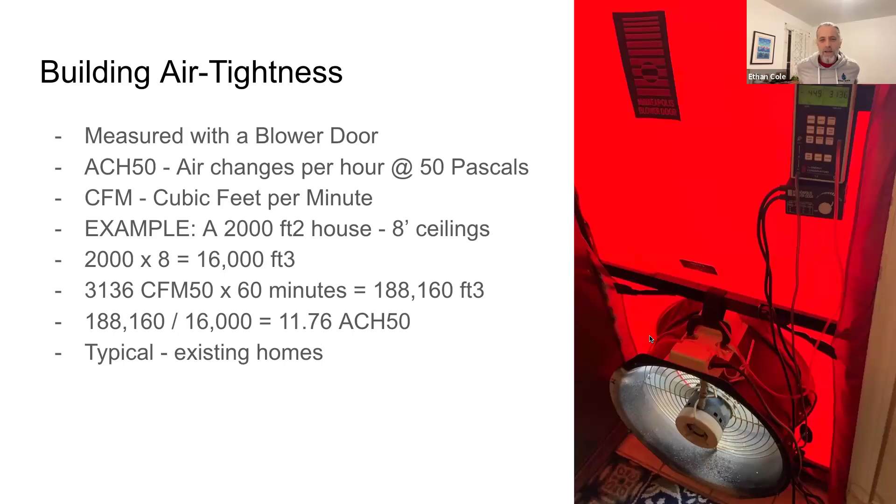So if the fan in this picture is measuring 3,136 cubic feet per minute at 50 pascals times 60 minutes, it means there's 188,160 cubic feet moving through that fan each hour. So divide that total volume of air by the volume of the house, and you'll see that this house has 11.76 air changes per hour at 50 pascals, which is in the range of typical for many existing homes. It's a little high, but it's typical.

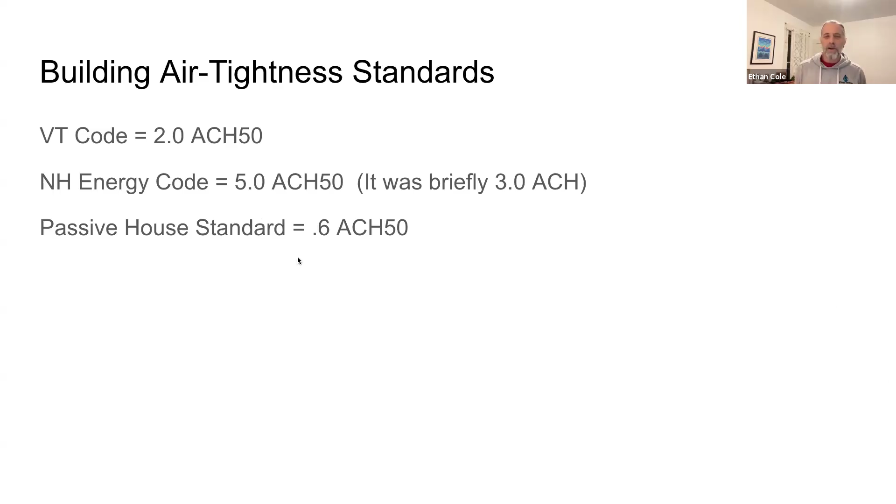For reference, some standards that exist in Vermont, the Energy Code now requires less than 2 air changes per hour for any new built homes. New Hampshire, by contrast, has a standard of 5 air changes per hour at 50, which is not very good and not hard to achieve. It was briefly at 3 air changes per hour before it was rolled back. The passive house standard is 0.6 air changes per hour at 50, which takes some effort and planning to achieve, but is quite attainable.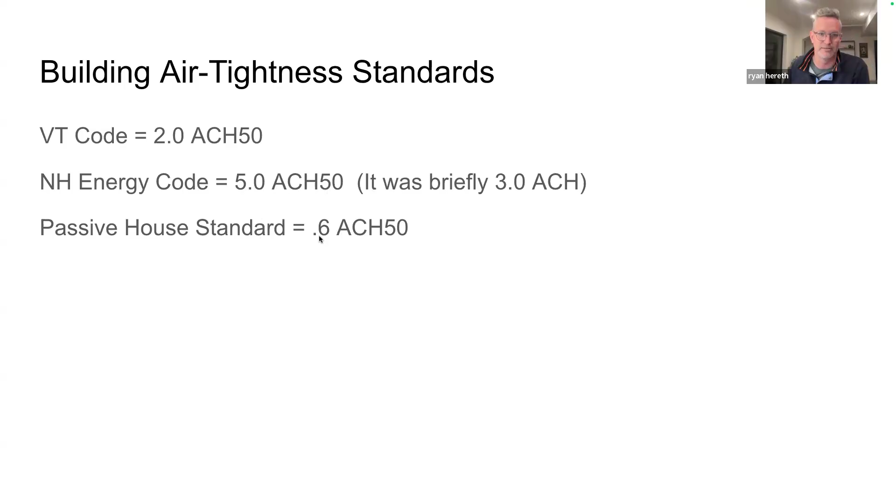So here's an example of a house we built in Norwich a few years ago, designed by Backtilt Studio. It won the Efficiency Vermont's Best of the Best, a 4-bedroom house. It is only 1,280 square feet, and that's the total footprint. So in this case, the 1,280 square feet does not subtract for the 1-foot walls, so it's less than that in terms of living space. But the ceiling is R60, and that's a measure of the thermal resistance, and the walls are R41.

This manometer reading was 156 CFM, so 12,800 cubic feet, 82 minutes to fully air change the volume of the house. That equals 0.72 air changes per hour at 50, which is not hitting the passive house standard, but did meet Efficiency Vermont's high performance threshold of 1 air change per hour when this was built.

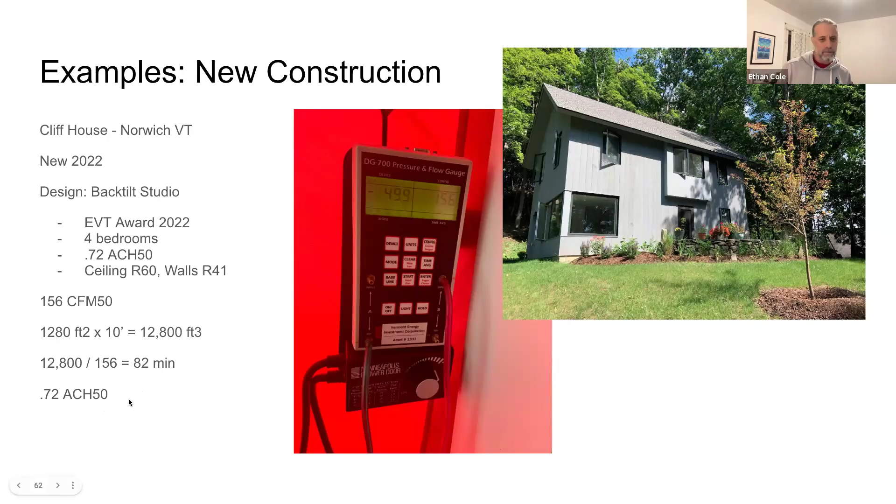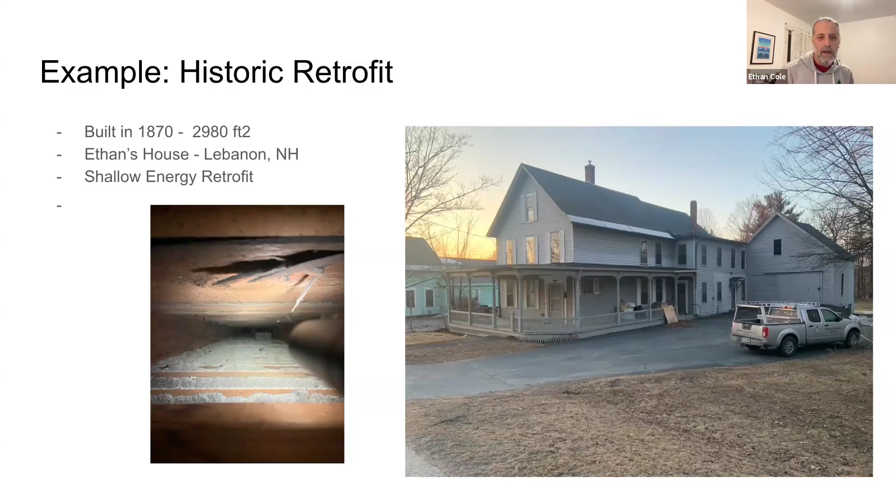This is my house in Lebanon. That was one of the houses in the energy use intensity slide, built in 1870. It's undergone a shallow energy retrofit. The walls had no insulation in them whatsoever. We drilled them and filled them with cellulose and then sealed those up.

Initially, the blower door gave us a reading pre-work of 7,531 CFM 50, which equated to 19 air changes per hour. After work, we got it down to 1,712, which equates to 4.3 air changes per hour, a 77% reduction. And the reason it hasn't gone further than that is because the house still has most of its old windows and its old doors, and those are the sources of air leakage.

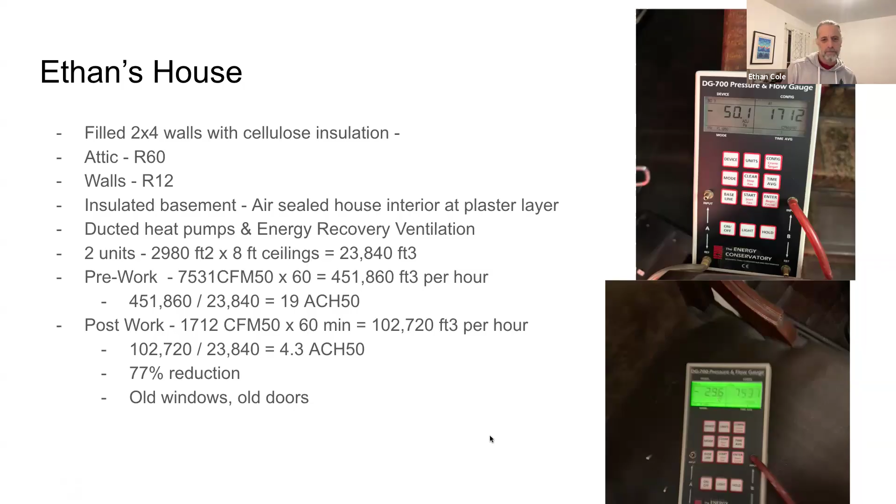Here's a project that we worked on at the Meriden Library with the town of Plainfield. It's a pretty simple geometry. There are two intersecting volumes, total of 3,600 square feet. We were able to achieve 0.27 ACH 50 in this building, which is well within passive house standards.

I reached out to one of the building managers with the town there today and was able to find out their kilowatt hours per year consumed divided by the square footage for a total EUI of 3.8 kilowatts per square foot, which is pretty cool. That's great.

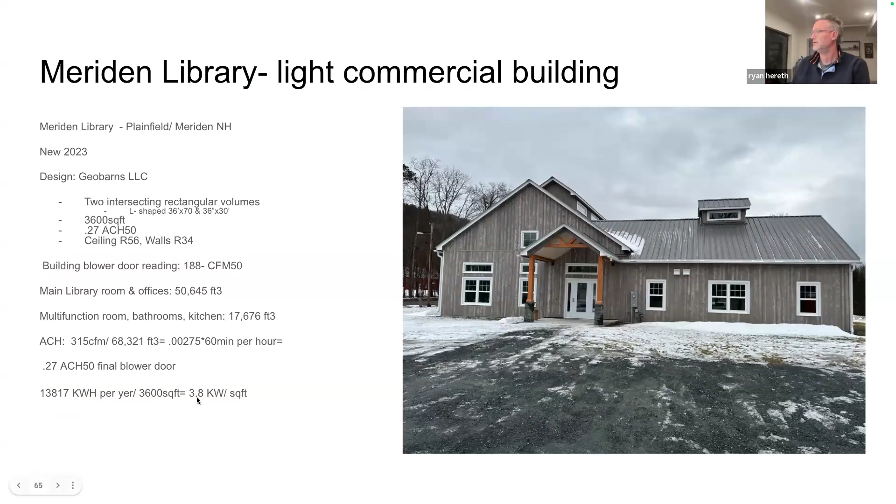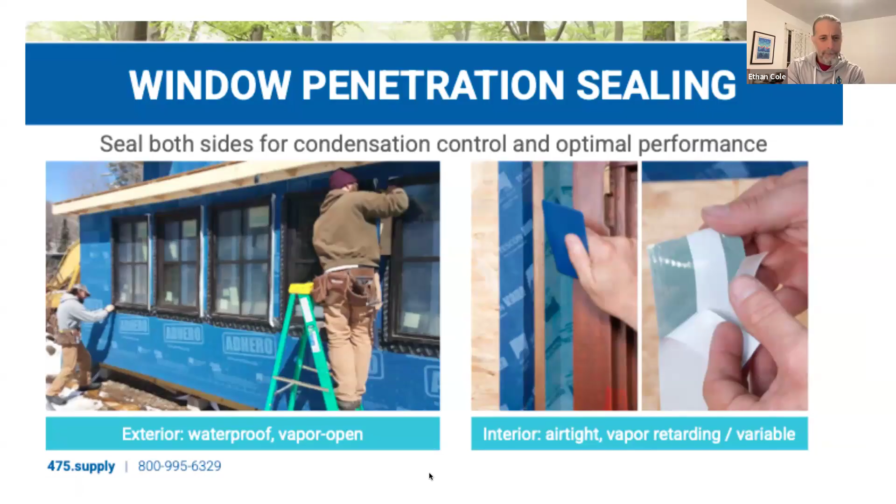So it is important to seal your windows. And the best way to do it is with good high performance vapor open tapes. You don't have to use vapor open tapes, but that's what this is depicting here. Some of the Tescon Vana products that we use quite often. And another diagram showing it.

Ryan, will you jump to the weatherization slide? We got a few more minutes. Sure. It's just the next one here before we do our, yeah, okay.

So if you want to weatherize a home in New Hampshire, it's worth applying for New Hampshire Saves. You go to nhsaves.com and qualifying homes are eligible for up to $6,000 in rebates and matching incentives. In Vermont, anybody can get incentive money for making thermal and energy efficient improvements to their home. And you just have to call an energy auditor who is part of Efficiency Vermont's Efficiency Excellence Network.

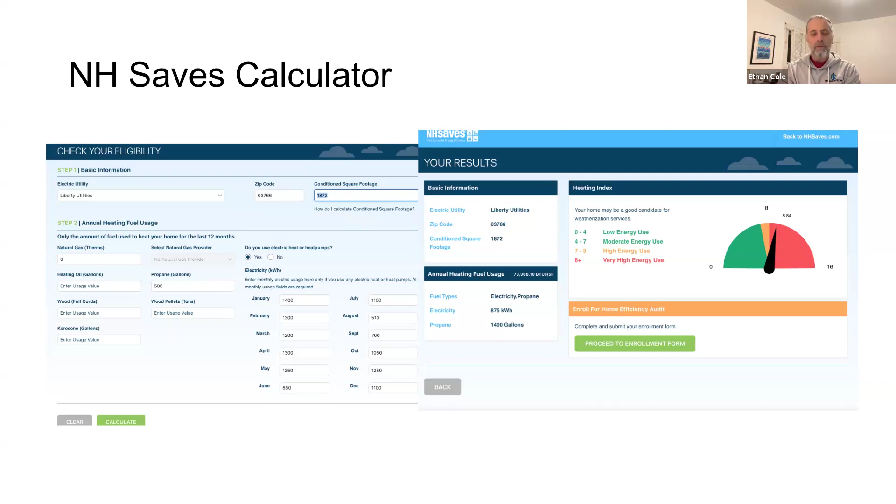Happy to talk to anybody more about this, but in response to one of the questions in the chat, if you want to tighten up your home, the energy audit is the place to start. Yeah. On the next slide, I'm showing you what it looks like at the nhsaves.com site, where you can enter your energy use information and it will let you know if you qualify for the program. If you do, you get a free energy audit and then the incentive money to perform the work.

And yeah, okay, so you want to put in... okay. Sorry. So we've got some slides here. We're just about out of time, yeah.

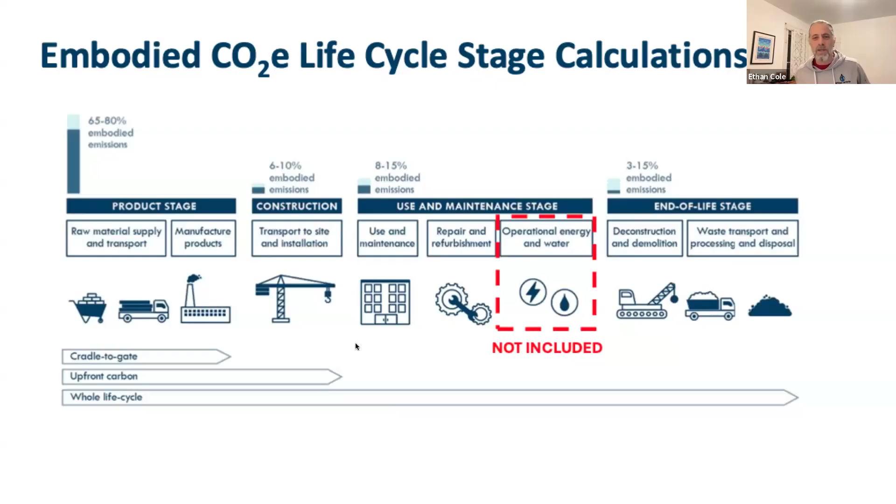In a nutshell, what it's telling us is if we build with naturally based materials, the best of which is our agricultural byproducts like straw, which are 100% effective and time tested, we can do a good deal to make our buildings actually carbon sinks. Happy to talk more about that, but we are just about at the end of our time. If we have time during the questions, we can get into some of that a little more. Maybe we should go back to the summary slide, Ryan. Yeah.

So, key takeaways. Our first lever of impact is the building size and geometry. And then we have air tightness: make it tight, ventilate it right. We can talk a little bit about that ventilation if you have further questions. And then designing for durability, getting the details right for how we're transitioning between the shedding of the water, the flashing of the windows, using the right interior and exterior air barriers and vapor retarders, and when at all possible, utilizing bio-based regenerative materials that Ethan was mentioning at the very end.

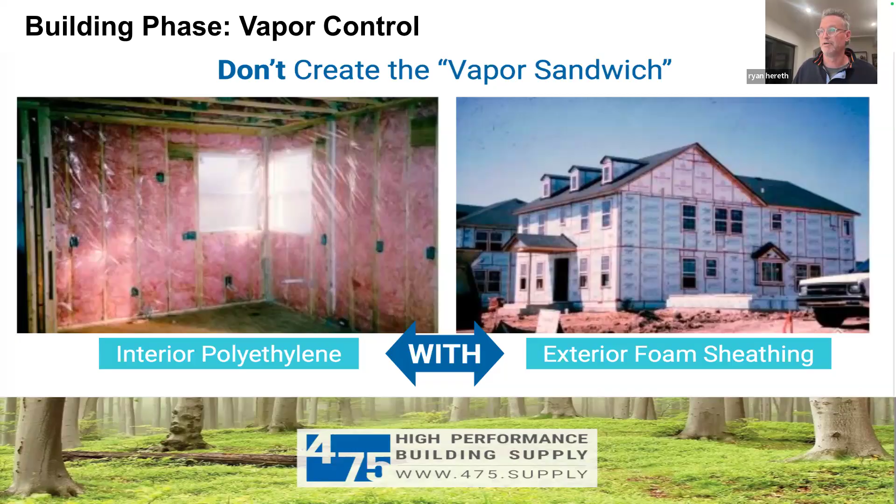The reason why we wrap the exterior sheathing with a vapor open, vapor variable or smart vapor retarder, and strap the inside of our buildings as well, I'm trying to get to one of these details in the slides, is that we create channels where part of this strapping is actually controlling the penetrations that we're making. That strapping is getting anchored to the stud and making a nice strong connection with that stud, sealing that air barrier on the inside of it.

And then for the sheetrock itself, we're often using just 1.25 sheetrock screws with 1-inch strapping on the inside, so the sheetrock screws aren't penetrating past that strapping. And so we're limiting the amount of air and vapor and moisture that can get into that cavity. And we're also allowing opportunity for any vapor and moisture that gets into the cavity to come out because of the type of membrane that it is. Hopefully that made sense.

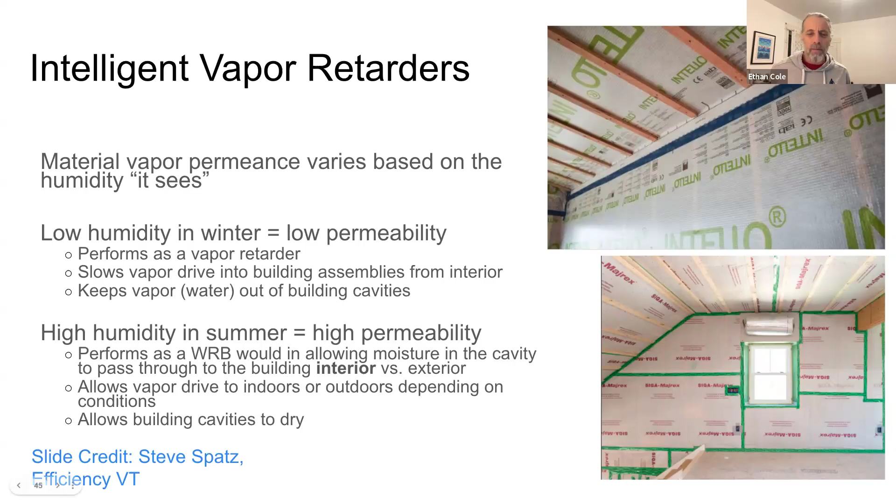Yeah, the intelligent vapor retarder will generally go at the inside. And some of the membranes we use at the exterior have permeability that allows for drying as well. Some of them also have that variable vapor permeability. But yeah, this is where we install them, at the inside of the house, beneath the finishes. Yep. And then similarly, we have vapor open, vapor variable membranes on the outside of our houses as well for the same reasons.

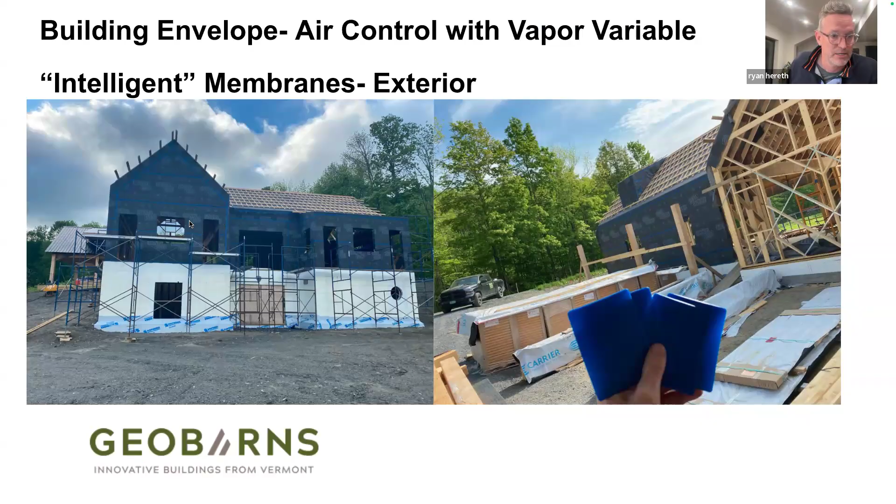So let's see, there's another question. We're coming very close to 8:30, but if you are willing to answer, there are a couple more questions in the chat. Yeah, absolutely. The other thing I was going to put up here real quick is, sorry, I'm trying to navigate too many screens here at once.